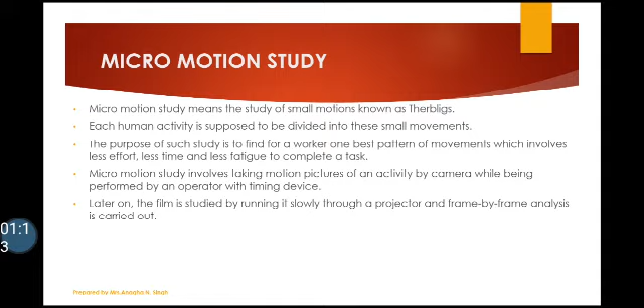Micromotion study involves taking motion pictures of an activity by camera while being performed by an operator with a timing device. Later on, the film is studied by running it slowly through a projector and frame by frame analysis is carried out.

Steps of micromotion study: first, filming the job being performed with a 16 mm movie camera. The range of speed is 1 to 64 frames per second.

Microchronometer or a wink counter is a timing device kept in the field of view while filming. The time can be read in winks, that is one wink is equal to 1 divided by 2000 of a minute. Analysis of the data from the film includes selecting a typical work cycle from among the filmed cycles.

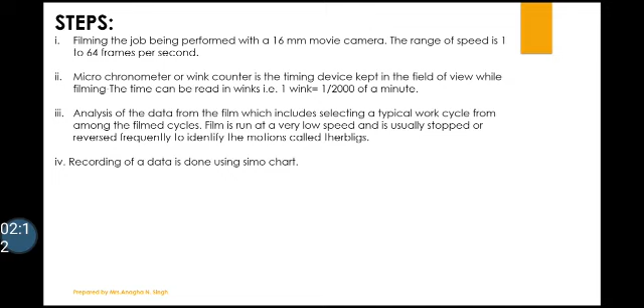Film is run at a very slow speed and is usually stopped or reversed frequently to identify the motions called therbligs. Recording of the data is done using a simo chart.

Now what are the therbligs? Therbligs are used to describe the basic elements of movements or fundamental hand motions of the work cycle. Frank B. Gilbreth, founder of method study, suggested these therbligs.

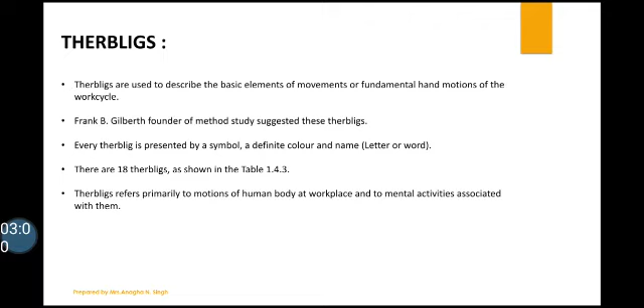Every therblig is presented by a symbol or definite color and name. It can be a letter or word. There are 18 therbligs, shown in the table. Therbligs refer primarily to the motions of the human body at the workplace and to mental activities associated with them.

Here there are some therbligs, their symbols, colors which are appointed for those therbligs, and meaning or definition of that symbol. First, assemble: symbol is hatching, A, color is violet, putting objects together.

Disassemble: hatching with only one vertical line, DA, light violet, separating different parts of an assembled unit. Avoidable delay: AD, lemon yellow, a delay within operator's control. Unavoidable delay: symbol UD, color is yellow, a delay on which operator has no control.

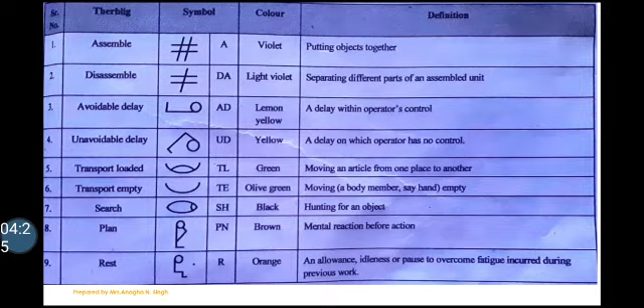Transport loaded: TL, color is green, move an article from one place to another. Transport empty: olive green, moving body or member, say hand, empty. Search: color is black, hunting for an object. Plan: PN, brown color, mental reaction before action. Rest: R, orange, an allowance, idleness or a pause to overcome the fatigue incurred during the previous work.

Position: P, color is blue, turning, lining up, orient or change the position. Find: F, grey color, mental reaction at the end of search. Inspect: burnt ochre color, examine an object for its quality.

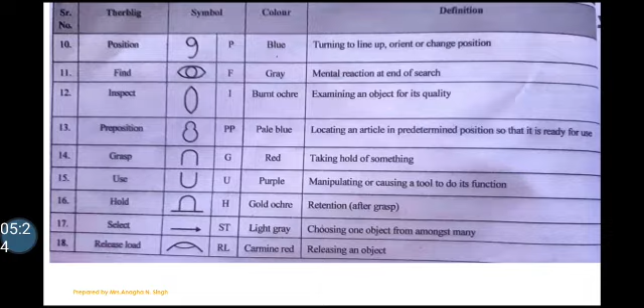Preposition: pale blue color, locating an article in a predetermined position so that it is ready for use. Grasp: taking hold of something. Use: U, purple color, manipulating or causing a tool to do its function. Hold: gold ochre, retention after a grasp. Select: ST, light gray, choosing one object from among many. Release load: carmine red, releasing an object.

Critical examination: by applying a set of questions to the recorded data for a selected method, it is known as a critical examination. The object of this test is to analyze facts and information critically to provide possible alternatives for the selection and development of improved method.

The critical examination has 5 W's and 1 H, that is what, why, how, when, where and who. The governing factors can be purpose, place, sequence, person and means.

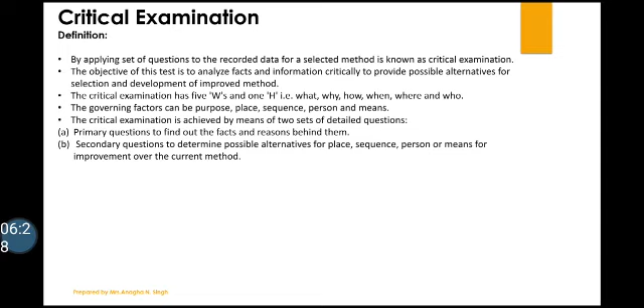The critical examination is achieved by means of two sets of detailed questions: first, primary questions to find out the facts and reasons behind them, and secondary questions to determine possible alternatives for place, sequence, person or means for improvement over the current method.

Here there are some questions, primary questions and secondary questions. Questions for a purpose: what is done, why it is done. Secondary question: what else might be done, what should be done.

Questions related to place: where it is done, why it is done there. Secondary questions: where else might it be done, where should it be done. Questions for sequence: when it is done, why is it done at that time, when else could it be done, when should it be done.

Questions related to person: who does it, why does that person do that. Secondary question: who else could do it, who should do it. Questions for means: how is it done, why is it done that way. Secondary question: how else could it be done, how should it be done.

These questions in the above sequence are asked systematically every time when method study is conducted.

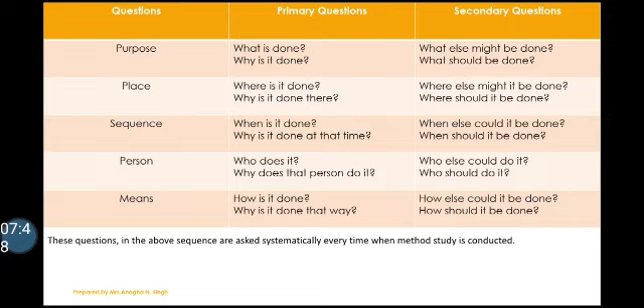Principles of motion economy: there are a number of principles concerning the economy of movements which have been developed as a result of experience and which form the basis for the development of improved methods at the workplace. There are 26 basic principles of motion economy. Although all of these are not applied to every operation, they form a basis for improving efficiency and reducing fatigue in manual work.

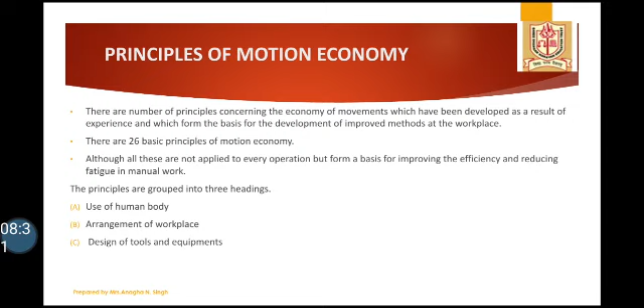First, use of human body. Both hands should start as well as complete their motions at the same time. Both hands should not be idle at the same time except during the rest period. Use both the hands simultaneously and use best motion sequence.

Hand motions should be made to the lowest possible classification in order to reduce the fatigue. Smooth continuous motions of the hands are preferable than zigzag or variable motions. Ballistic free swinging movements are faster, easier and more accurate than controlled movements.

Rhythm is essential to the automatic performance or repetitive operations. Work should be arranged so that eye movements are confined to a comfortable area. Hands should be free from all work that can be done by the feet.

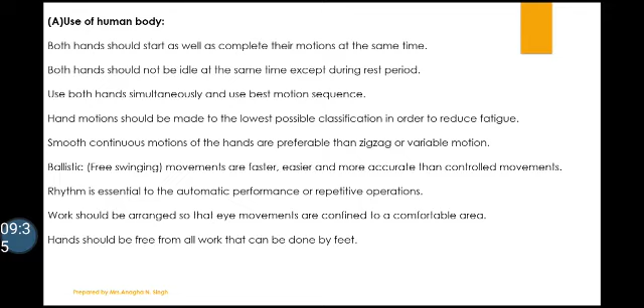Then arrangement of workplace. All tools and materials should be placed at a definite and fixed place within easy reach. All tools, materials and actuating devices should be placed in front of the operator at a distance as near as possible.

Provide gravity feed bins and use gravity conveyors to transport the material. Use gravity chutes or conveyors to drop the finished parts near to the point of assembly so that the operator does not have to use his hands to dispose of finished parts. Material handling equipments should be so arranged that to deliver the material as close to the point of use as possible.

Materials and tools should be arranged to permit the best sequence of motions. Provide adequate lighting for better visual perception. Provide proper tables, chairs, etc. whenever possible to permit good posture.

The height of workplace and chair should be such that worker can sit on or stand comfortably. Keep the shop in a good condition, neat and clean.

Design of tools and equipments. Use jigs, fixtures, stops, foot pedals, power operated tools as possible to reduce manual work and keep the hands free as possible. Reduce noise level, definitely increase the speed of work and requires less energy.

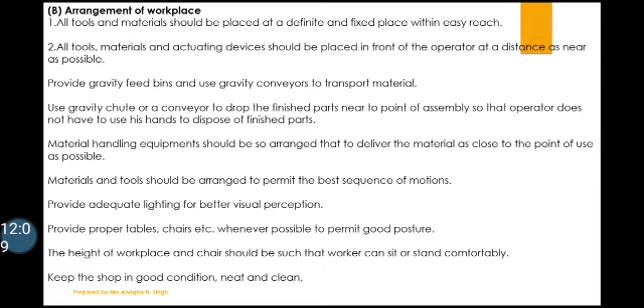Where the work is carried out by fingers, the load distribution onto each finger should be as per the normal capacity of the finger. The location of levers, crossbars and hand wheels, etc. should be so decided that operator can operate with the least change in the body position and with the best mechanical advantage.

Workplace layout. Good workplace layout and productivity are closely related to each other. A comfortable workplace keeps workers more satisfied. Bad working condition always results in poor productivity. Therefore, while designing the layout, general principles of workplace layout should be taken into consideration. These are:

First, materials and tools should be located within the normal working area and close and in front of the operator as possible.

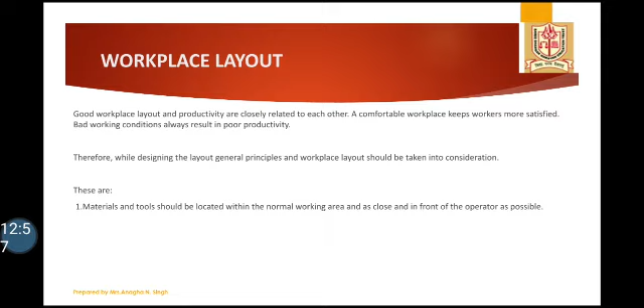Here you can see operating working area. In the middle operator is there and you can see the two hands of the operator. You can see normal working area shown by dotted hands and maximum working area shown by dark hands. So this is the normal working area for any operator.

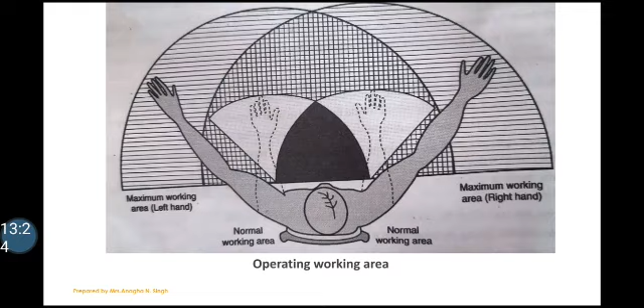Here there are some rules. First, materials and tools should be located within the normal working area and as close and in front of the operator as possible. Anything kept beyond the maximum working area will make movement of trunk and increase the fatigue. Materials and tools should be located in the order in which they are used in the assembly.

Workplace must be clean and well painted as cleanliness affects workers' efficiency. Workplace must be properly illuminated so as to avoid eye strain. Try to minimize the intensity of noise as possible. It is possible that reduction in the noise results in an increase of efficiency.

Height of the chair and the workbench should be arranged in a way that permits comfortable work posture. From design point of view, man-machine must be considered as a single unit so that man can handle the machine with ease and maximum comfort.

Worker should be able to operate levers and handles without changing the body position. Workplace should be free from presence of harmful elements like heat, smoke, dust, excess humidity and vibrations.

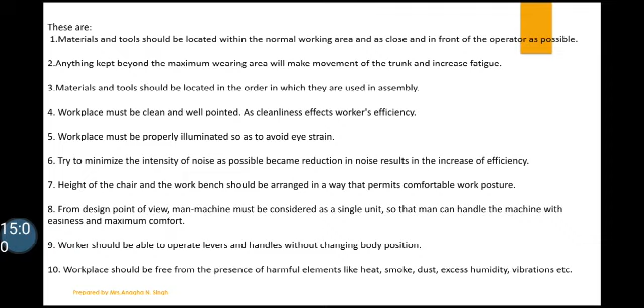Work measurement. Introduction. Work measurement is also called by the name time study. Work measurement involves assessment of the time taken to do a job. Or, a work measurement technique finds the time required to do a job by a qualified operator working at a standard pace and using standard method. The time thus calculated is known as the standard time. The method to do the job is normally standardized by using method study procedure before carrying out work measurement.

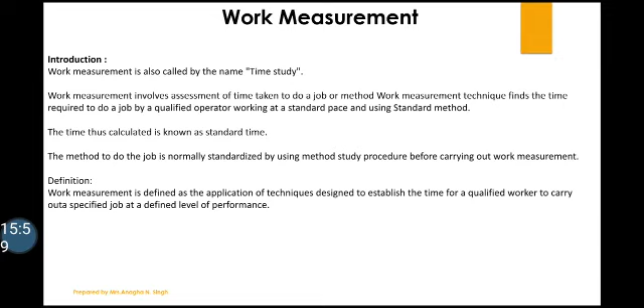So let us see the definition. Work measurement is defined as the application of techniques designed to establish the time for a qualified worker to carry out a specified job at a defined level of performance.

So what are the objectives of this work measurement? First, to determine the standard time for various operations. This helps in fixing the wages and incentives. Second, to estimate the cost of product accurately.

Third, planning and production control. Fourth, to achieve the delivery dates by assessment of accurate time for completion of the order. Fifth, to find out how many machines an operator can run with the help of a man-machine chart.

Sixth, to balance the work among the group of workers with the help of a multiple activity chart. Seventh, to identify standard worker. Eighth, to train new employees.

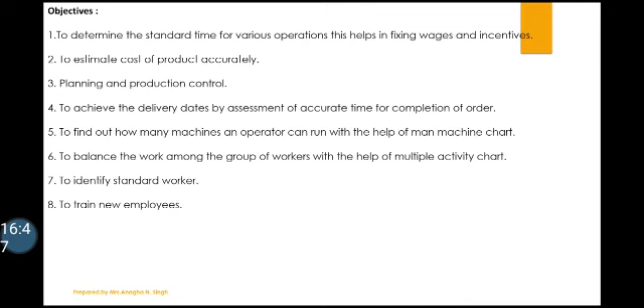The basic procedure for work measurement: select, record, examine, measure, compile and define. Select the work to be studied and determine the objectives of the study. Record all the information available about the job, the operator and the working condition.

Break down the job into the elements. Examine the recorded data and the detailed breakdown critically to ensure that the most effective method and motions are being used. Measure the time required to complete each element using the suitable work measurement technique and calculate the time required to complete the work cycle, which is known as the basic time.

Compile the standard time for the operation or work cycle. Add the suitable allowances to compensate for fatigue and personal needs. Define precisely the series of activities and the methods of operation for which the time has been compiled, and issue the time standard for the activities and the methods specified.

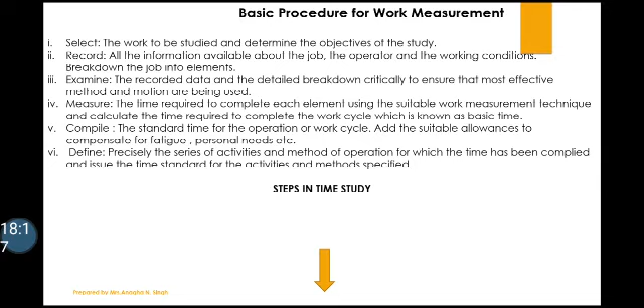Steps in the time study. So here are some steps of time study. Select the job to be timed. Obtain and record details regarding method, operator, job and working conditions. Define the elements.

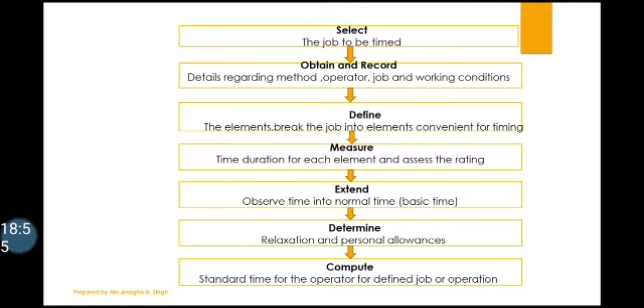Break the job into elements convenient for timing. Measure time duration for each element and assess the rating. Extend the observed time into the normal time, that is the basic time. Determine the relaxation and personal allowances. Compute standard time for the operator for the defined job or operation.

Now let us see time study. What is the definition of time study? Time study is a work measurement technique for recording the times of performing a certain specific job in certain elements carried out under specified conditions, and for analyzing the data so as to obtain the time necessary for an operator to carry out a defined rate of performance.

Time study is a technique for determining as accurately as possible, from a limited number of operations, the time necessary to carry out a given activity at a defined standard of performance.

The following are the steps in making a time study. Find the observed time for a given task. Apply a rating factor and find the normal time. Add allowance for rest, etc., and find the compiled time or standard time.

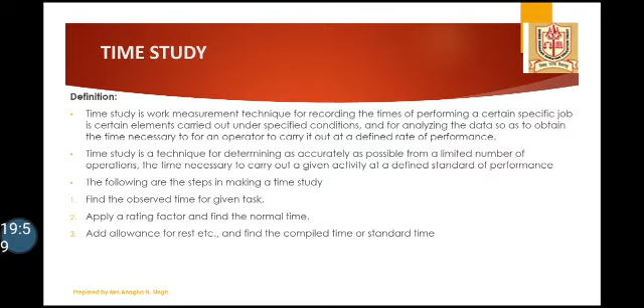In performing a time study, industrial engineers time the effort required to perform a defined task. While it may sound simple, this is a complex process that requires special training and experience. Time study is an application of a work measurement technique to establish time for a qualified worker to carry out a specified task under specified conditions and at a defined level of performance.

Uses of time study. What are the uses? Determining the schedules and planning the work. Second, determining the standard cost and as an aid in preparing budgets. Third, estimating the cost of a product before manufacturing it.

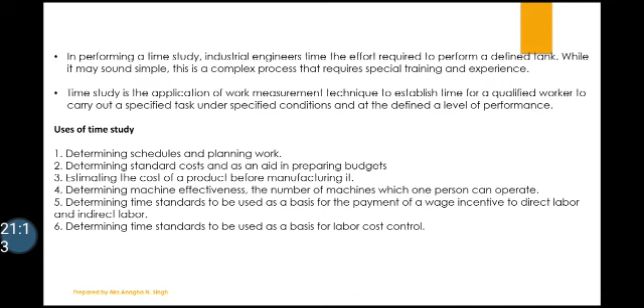Fourth, determining the machine effectiveness, the number of machines which one person can operate. Fifth, determining the time standards to be used as a basis for the payment of wage incentives to direct and indirect labor, and determining the time standards to be used as a basis for labor cost control.

Now let us see the procedure for conducting the time study. First, secure and record the information about the operation and operator being studied. Second, divide the operation into elements and record a complete description of the method. Third, observe and record the time taken by the operator.

Fourth, determine the number of cycles to be timed. Fifth, rate the operator's performance. Sixth, check to make certain that a sufficient number of cycles have been timed. Determine the allowances, and determine the time standards for the operation.

Reasons for element breakdown: one of the best ways to describe an operation is to break it down into definite and measurable elements and describe each of these separately. Second, standard time values may be determined for the elements of the job. Such elemental time standards make it possible to determine the total standard time for an operation.

A time study may show that excessive time is being taken to perform certain elements of the job. An operator may not work at the same tempo throughout the cycle. A time study permits separate performance ratings to be applied to each element.

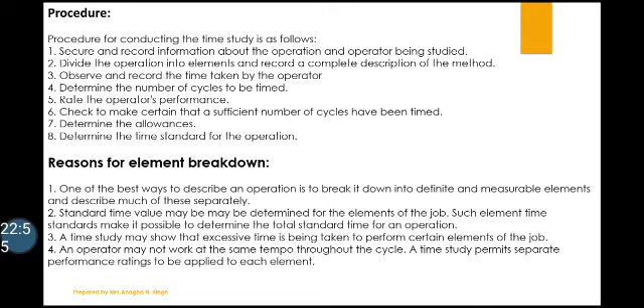Rules for element breakdown: all manual work may be divided into therbligs, which are too short in duration to be timed with a stopwatch. A number of them must be grouped together into elements of sufficient length. The element should be as short in duration as can be accurately timed. Handling time should be separated from machine time. Constant elements should be separated from variable elements.

So there are some time study equipment: first is a stopwatch, second is a study board, and third is time study forms. So here we end with time study. Thank you.